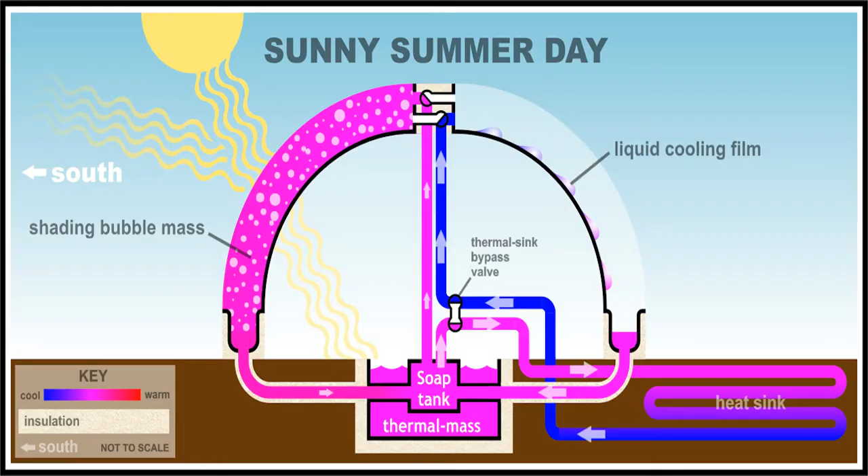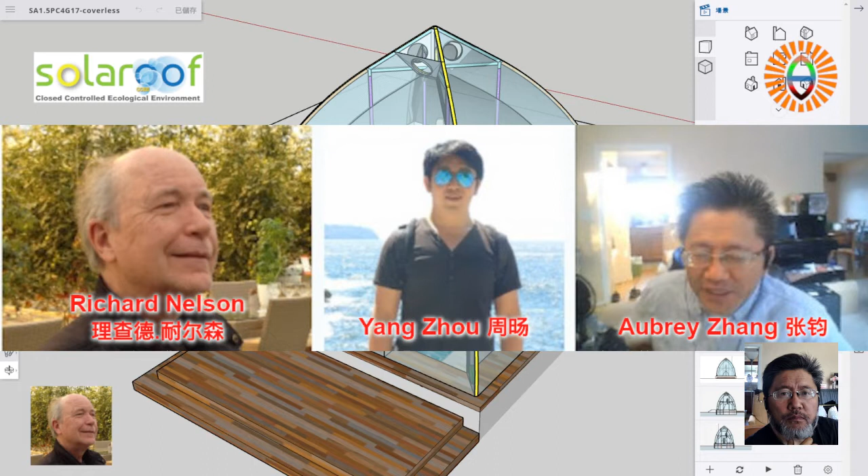This is the newest file I got from Yang, so I like to just quickly go through it. There's not much change. The only change is the door - we made it slightly taller, same width, slightly taller, looks nicer, and that's it. He also made a few scenes.

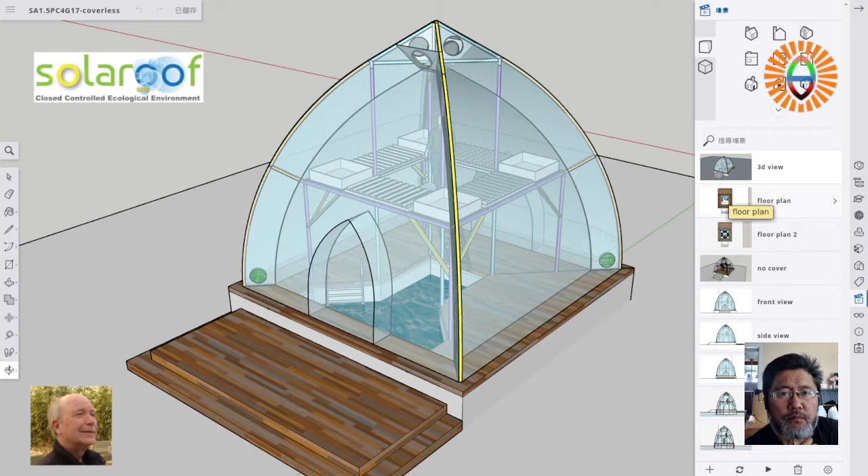So yeah, I'll just go through it quickly. This is the first one, 3D. Then we look at the floor plan. Click this, and then you see it shows the deck area. This is the swimming pool.

This is we already shared - this is the square swimming pool. This shows the boundary of the cavity. This shows the edge, and that shows the thickness of the wall roughly. And then the rest underneath this is just pure water.

But within this there's an open area for swimming. There is also a wire mesh partition fence around so that no one can get underneath the deck. Okay, so this is the ladder coming down.

Clearly shows you the relative size of the human swimming area versus the entire pool. This is a pool within the pool. We have to stress this, because most people cannot see right underneath, right?

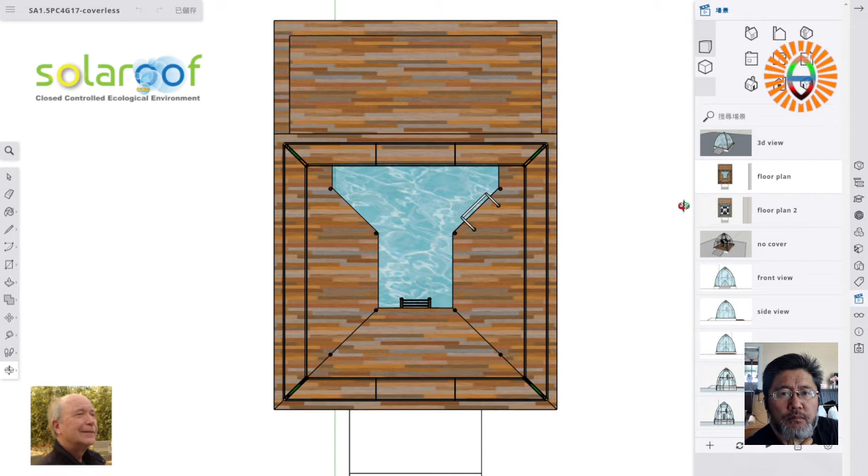Okay, and then that's the floor plan. This is another floor plan showing it with the covering, still the top view, but with the top floor.

This is the square grow beds, right? Okay, and this is the rectangular grow bed. You can make it using 5-inch gutters. Okay, and then just very simple IAVS Sandponics.

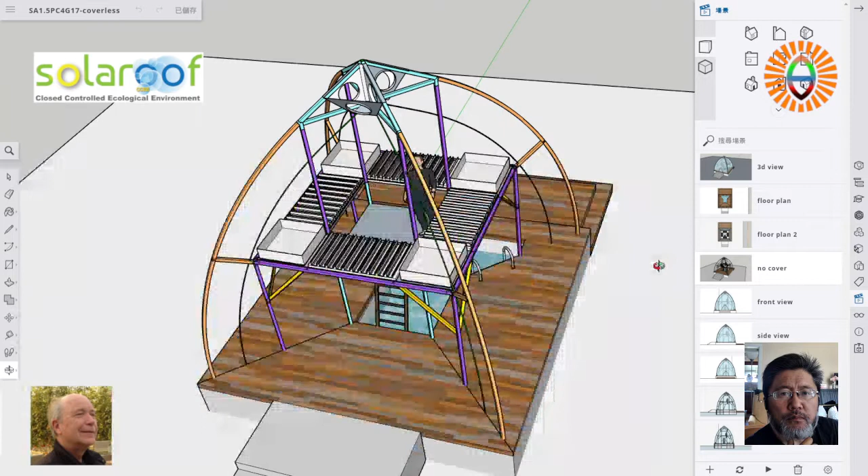This is no cover, showing you the whole thing without the cover, so give you a clear view inside. See there's a ladder, there's a platform, central platform you can stand on, and then this is the vegetable growing area. And also, like in my case, I could even have a hanging garden.

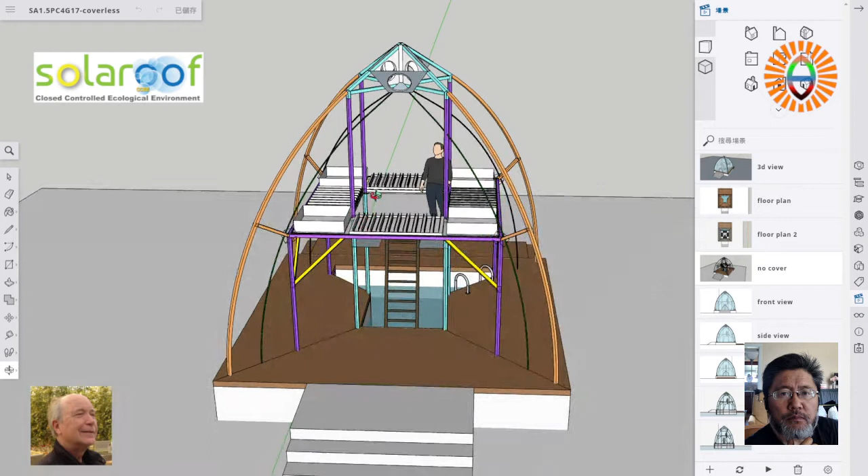This rectangular grow bed hangs from this middle level, and then you can also, if you want to grow more vegetables, do more growing - then you can even have a grow bed frame on the deck, and then another level of grow beds.

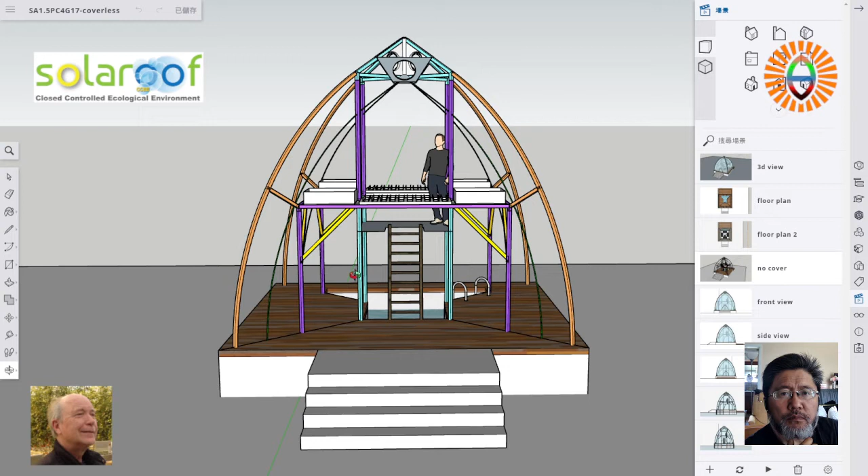So then you have more area for growing. So it depends, right? Depends how much food you want, how much vegetable you want to grow inside. And that's it. So basically this is the simplest form of the aquaponics.

It's called IAVS Sandponics. Simply have a sand bed, and then you pump the water. The fish normally will be underneath the deck, and then you pump the fish water to the top, and then the sand acts as a physical and biofilter, leaving the fish poo on the surface, so that air can help cultivate the population of aerobic bacteria, and then aerobic bacteria will turn the ammonia into nitrate.

That's why we use sand rather than using Hydroton, because this way you have the fish poo on the surface rather than at the bottom of the grow bed.

This is the main problem with traditional or conventional aquaponics - you have the fish poo end up at the bottom of the grow bed, and also they pump the water all the time, 24/7, which is not needed. And there's no oxygen - no air in the water, no air at the bottom of the water, so that won't be good for aerobic bacteria cultivation. That's why we like to use sand.

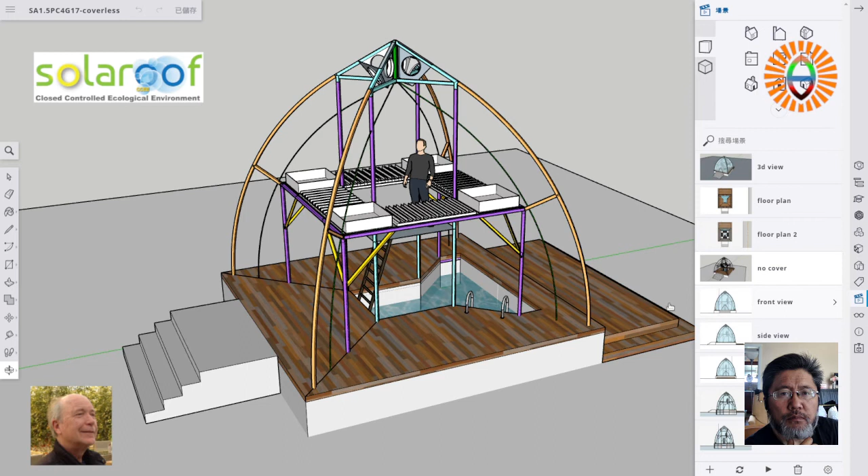This is the front view, just looking from one end of the entrance. This is the entrance that you enter, and then you see a ladder. It's blurry because there's a layer of fabric for the door. We plan to use a zipper - a zipper sealed door, and then you zip it to open and enter. In the summertime you can take it off, leave both ends open for air. Some people like to swim, and the wind blows through and you feel nice.

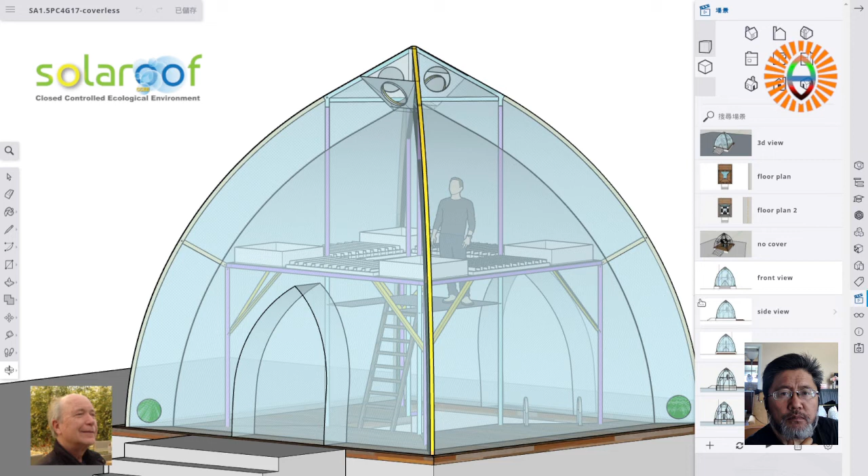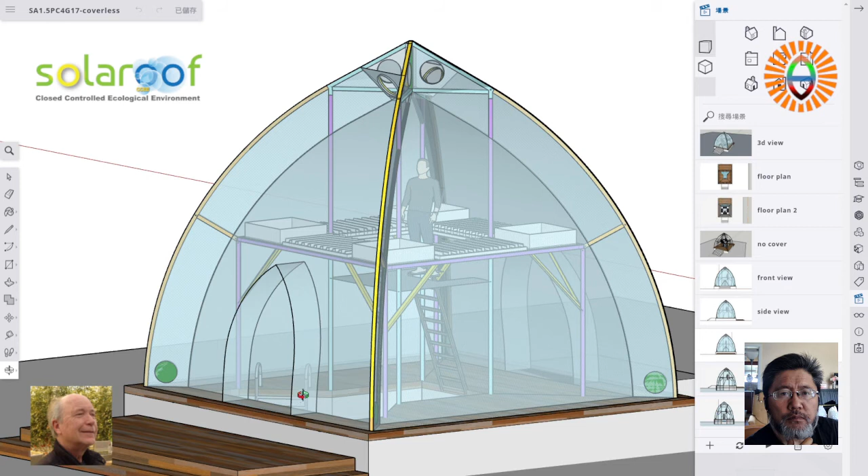Let's look at the side view - this is a side view showing from the side, and then the rear view from the other side. This side has a large deck, a stepped deck. You can sit here over the edge and enjoy the view around, so for summertime this is a perfect place to hang around and rest. Lots of area for the decking, so you can even camp here.

You can camp here, and turn to something else - this gives you a combination of swimming pool with iAVs sandponics. Both systems increase the thermal mass that is needed to store enough solar thermal energy in the water and store it there, creating a stable system, a stable water body to maintain the base temperature. Once you have massive thermal mass inside any building, you create a stable and steady state - that's the important portion of the whole design.

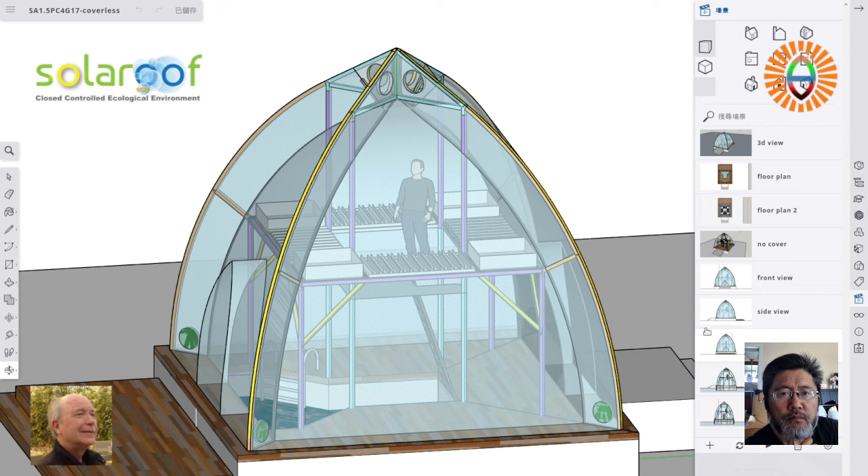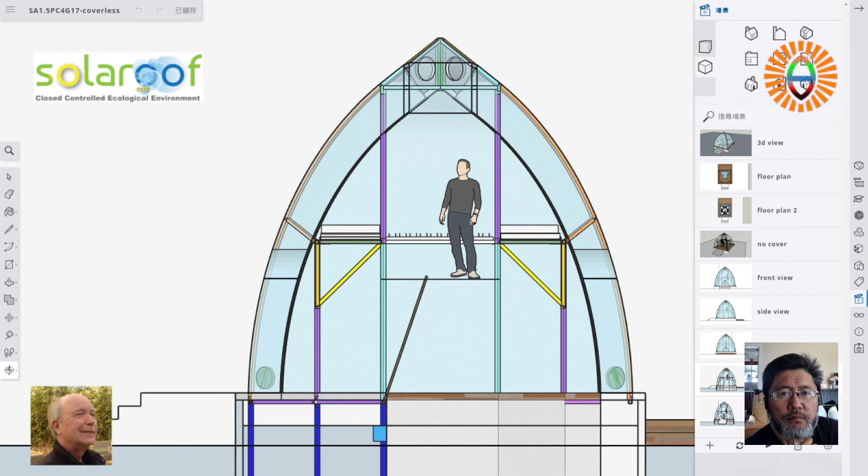Then we have the section view from the section, the see-through. You see the ladder - it leans against this, and you can stand here and tend your vegetables. So this is section 1, section 2, just looking at the whole thing from the other side.

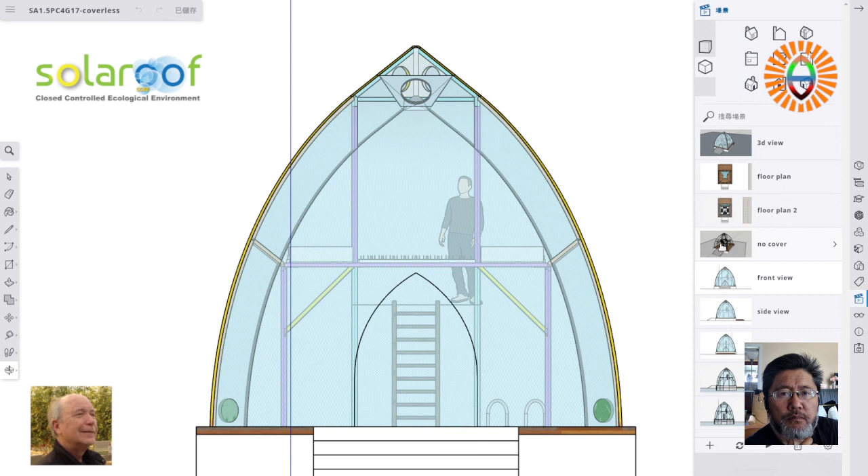We believe this is the all-in-one design that meets all the needs. Whether it's a swimming pool, you have it. Whether it's an aquaponics grow system, you have it. There's a lot of other ways you can use it once you have a large flat deck, so there's a lot you can do with this design. We believe most people will love it because you have a covered swimming pool, and it's all-climate. It's very good.

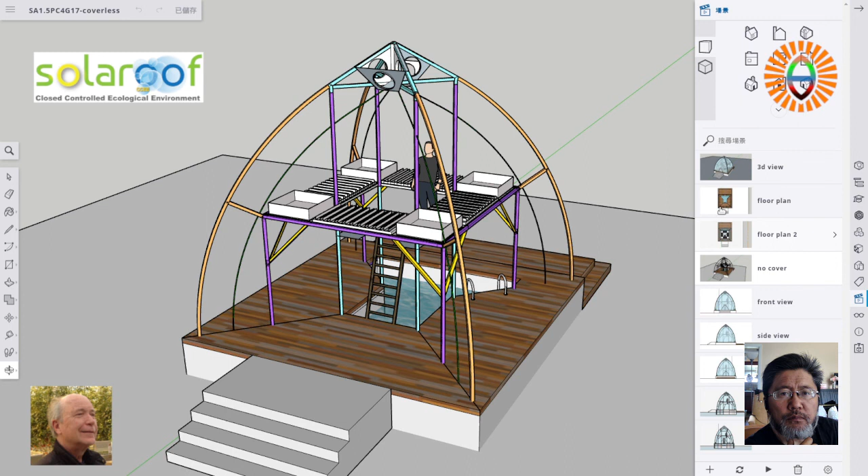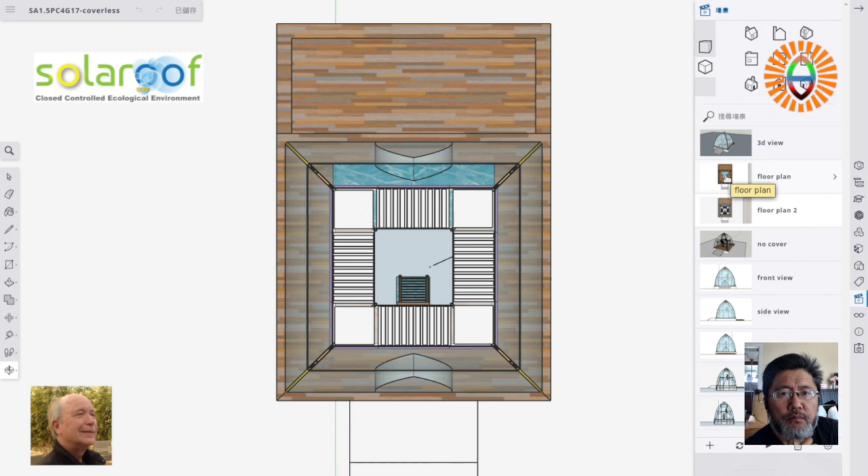Also, recently CBC Radio interviewed me - just a radio station. I'll let you know when the radio program will be broadcast, and then I'll see whether I can use it, because I use the backyard webcam to shoot the whole process. Maybe I can get the audio and match it with the video I captured. So anyway, that's it, until next time.